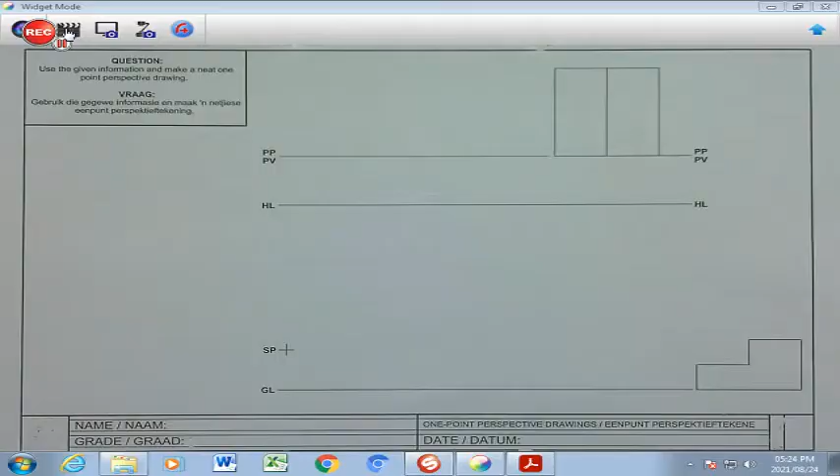Hello grade 9s, we have reached the final module, module 7, which refers to perspective drawings. It's not too difficult. Let's look at a few activities, and they are all the same.

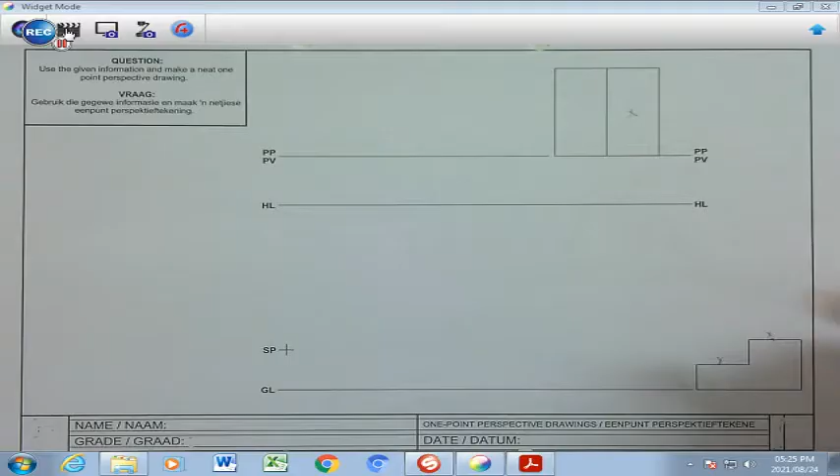Allow me to explain quickly. You have a block here shaped like a step, and this part here corresponds to that part over there. I'm going to mark that with an X - that's the higher part - and this part with a Y is the lower part you see there. That is the top view as seen from my arrow pointing down like that. This side here, represented by a line, is this entire shape that you see here.

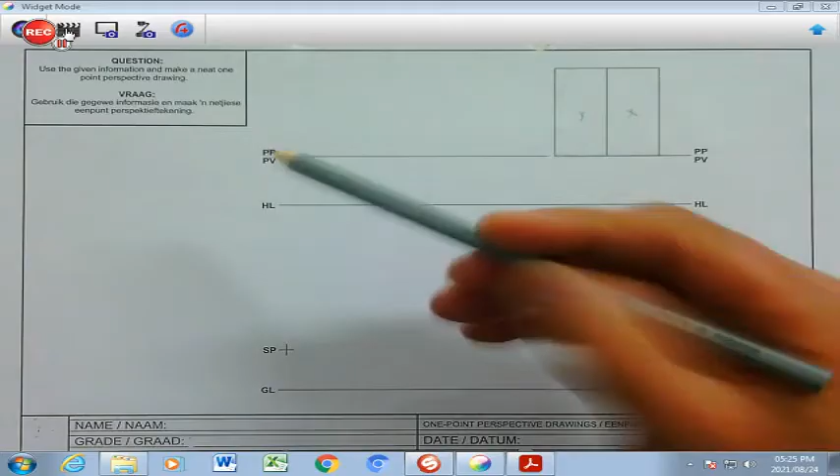Then we have three different lines here. The first line is your PP, your picture plane. This shape is situated on the PP line, which means these points here can be projected straight down. Points that aren't touching the picture plane must be drawn in line with your SP, which we have here, and I'm going to show you how to do that as well.

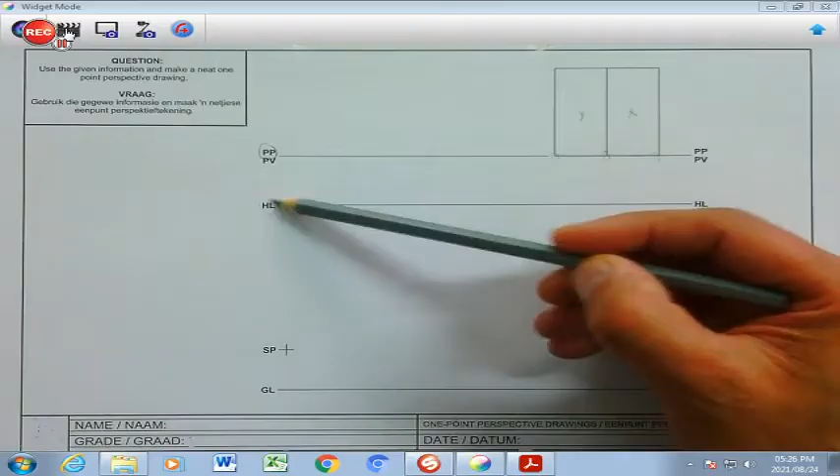The second line from the top is your horizon line. This line has the ability to move from drawing to drawing; at this moment it is here. Then we have our ground line - this is the line where the shape is situated.

And finally we have the station point. This is the point where you are standing, viewing this shape that you see here.

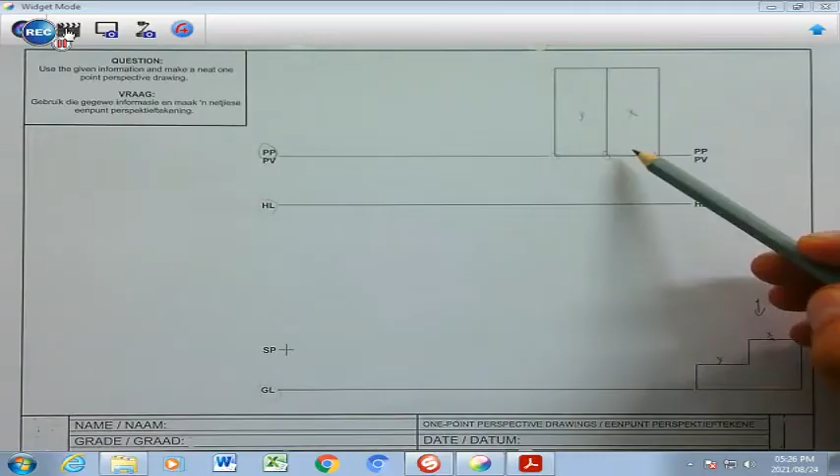Alright, we are now going to look at the construction of a one-point perspective and what rules to apply when doing this drawing. The first step is literally to draw this shape in this space here, and I want to show you how that works.

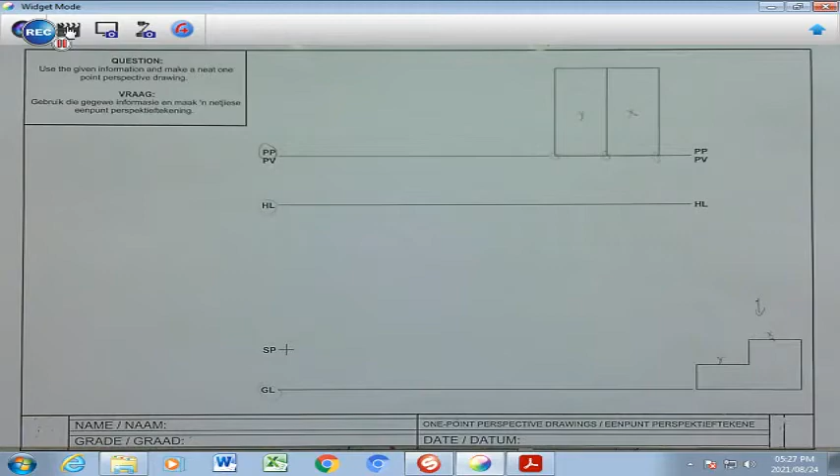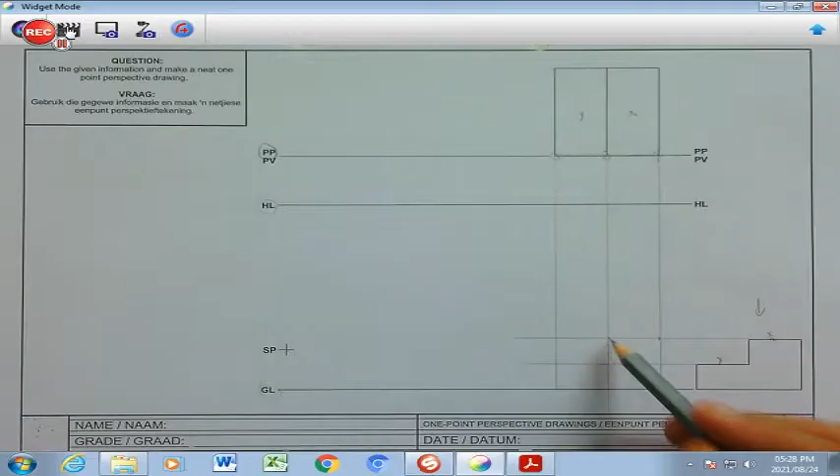So the 3 points touching, we're going to project down - 1, 2, and 3 lines down - and these will indicate my height. I'm going to project my horizontal lines across here; that's my height, and already you can see the shape. We'll highlight that shape starting with the top line, darken that, and that point over there, and the bottom one, all drawn horizontally.

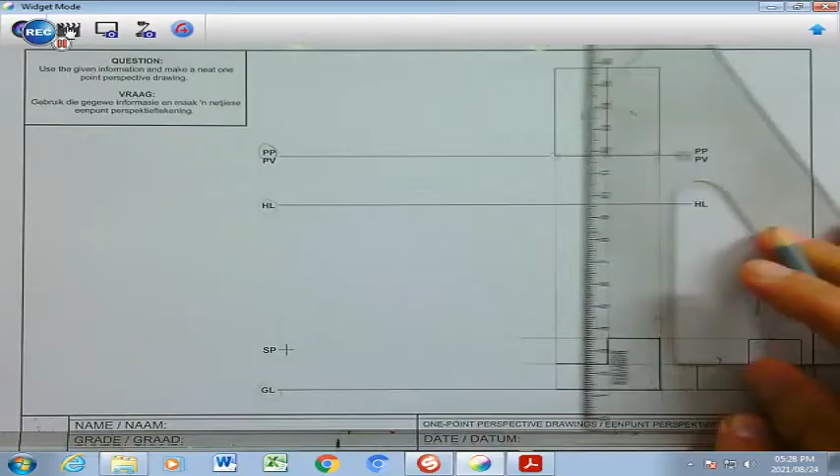Then I'm going to do my sides, which would be drawn vertically - that one, this one here, and that one over there. So I've created the shape in that space so that it's aligned.

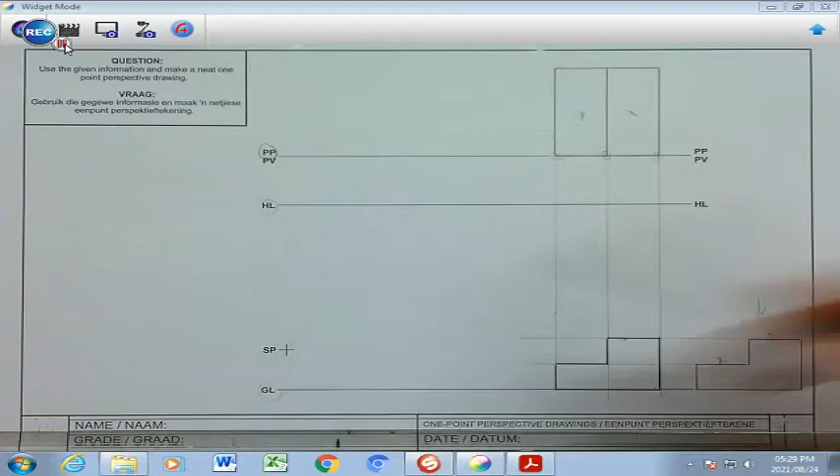My second step is that I have a stationary point here, which is where I'm standing viewing this, but I have to create a vanishing point directly above my stationary point. So wherever my stationary point is, I'm going to project the line up, and wherever it crosses my horizon line, I'll clearly mark it and write the abbreviation VP - my vanishing point. So my vanishing point will vanish with these corners which you see here.

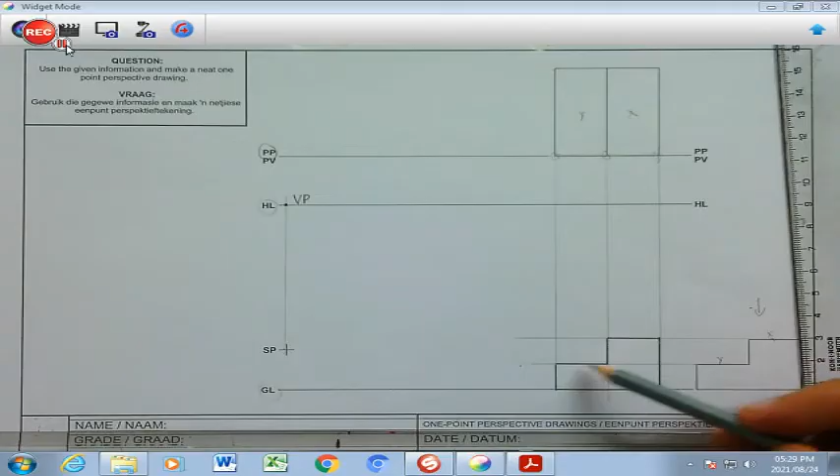So I'm going to look at my 3 other points not touching my picture plane - that one, this one, and this one over there. What I'm going to do is draw those 3 points in line with my SP. I'm going to keep my set square, or any straight edge, and draw that line until it gets to my picture plane.

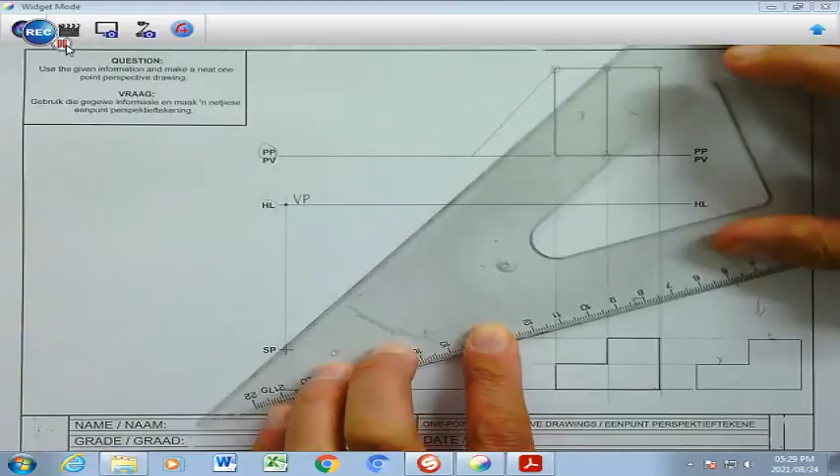I'm going to move to the second point there. I'll take this point and draw it in line with my SP, and take that point as well and draw it in line with my SP.

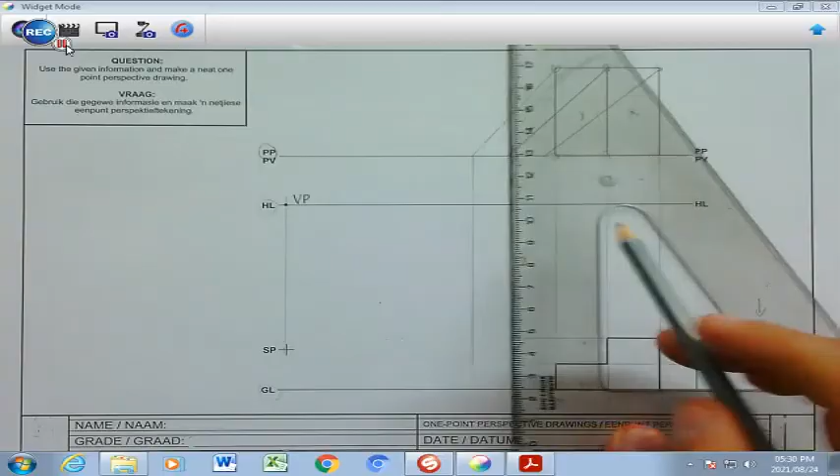I'm going to stop it there, because once it reaches the picture plane, it can come straight down, and it has the heights of these points which are actually touching here.

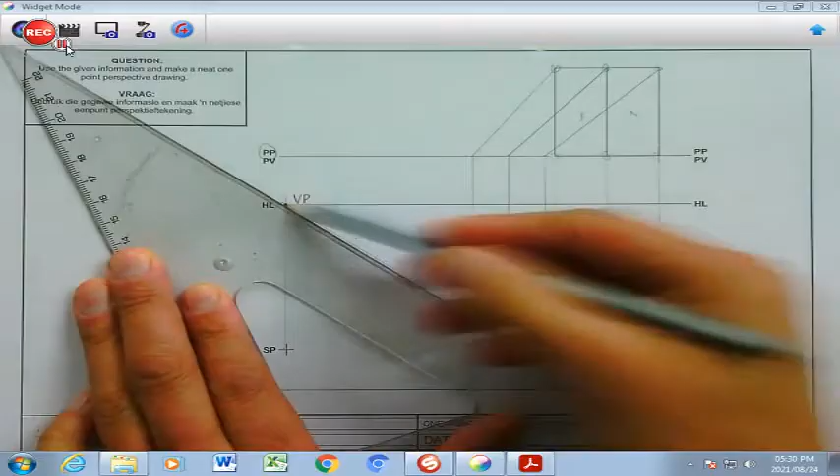My next step is to take all these corners or these points here to my vanishing point. So I'm going to start with that point over there by drawing that one, and moving to the next one, drawing that one there. That one going there, that one there, and the last one here.

Right, learners, now you have to ensure that you understand what you're doing. So I'm going to dot my points. So this becomes a side here. That point there, you can see.

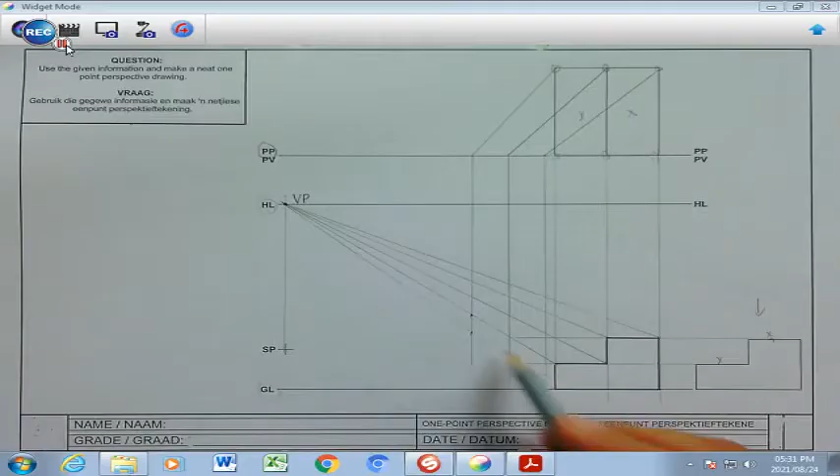There's my line, and I'm going to highlight my line, which is going to be that corner there. So I'm going to draw that corner there, and connect this corner to that corner on those lines which you've drawn faintly. And there I've created my first side, which is that side over there.

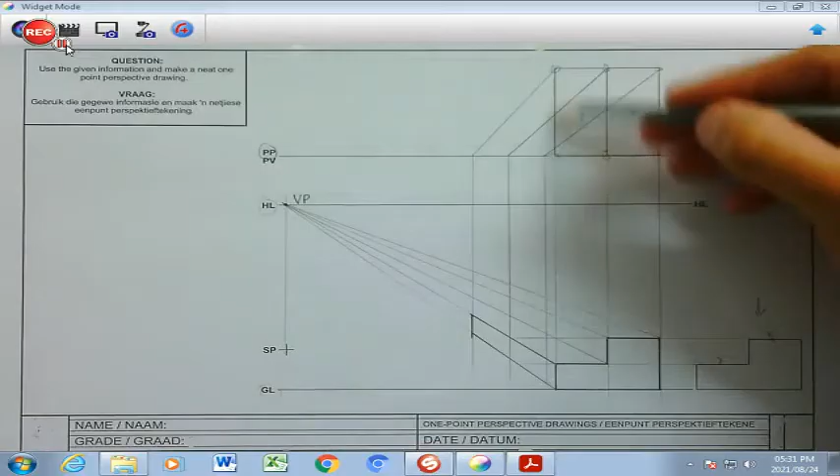Then of course you will see that goes up, and this goes to that side, which is basically horizontal, so it goes this way until that point over there. So I'm going to draw a line dark until that point over there. So you follow the side that you will see here.

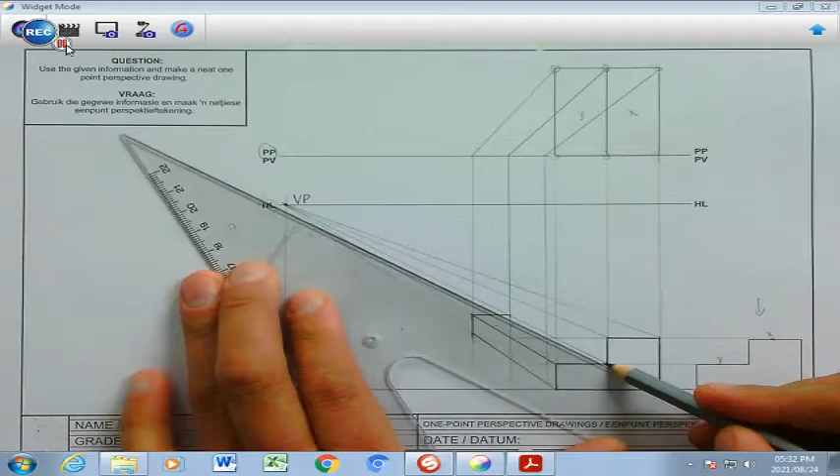Then I can create another platform here by connecting this line with this point to that line. Then it's going to go up, so it's going to go up, and there I will find that upright point connecting with that line.

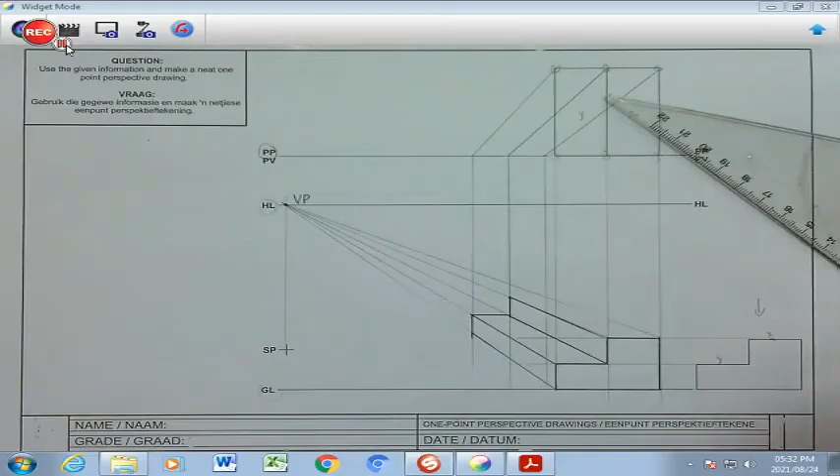There's another side that has formed, which I can now easily connect like that, and then immediately it goes horizontal again, which means I have to draw this line horizontal, and it meets up with that corner there and that corner there, which makes it very accurate and perfect.

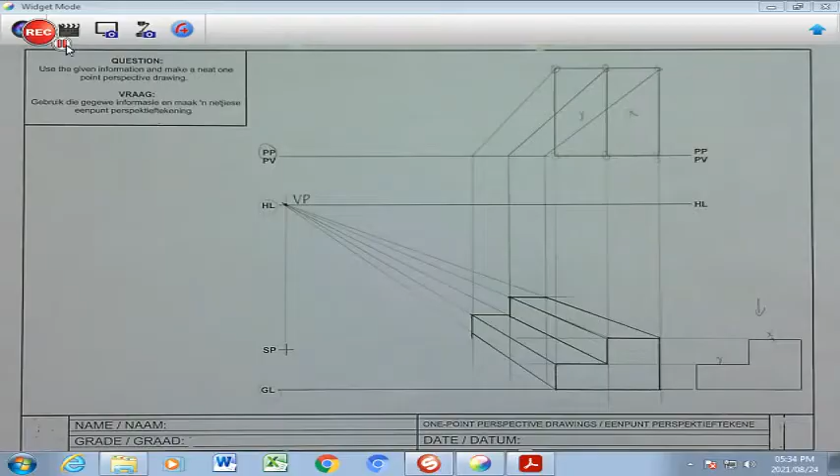So there's my line, and then I'm going to connect that point with that point there at the back. And there, young ladies and young men, I've created my block in a perspective view. You can see it starts here wide and it narrows the further it goes to my vanishing point.

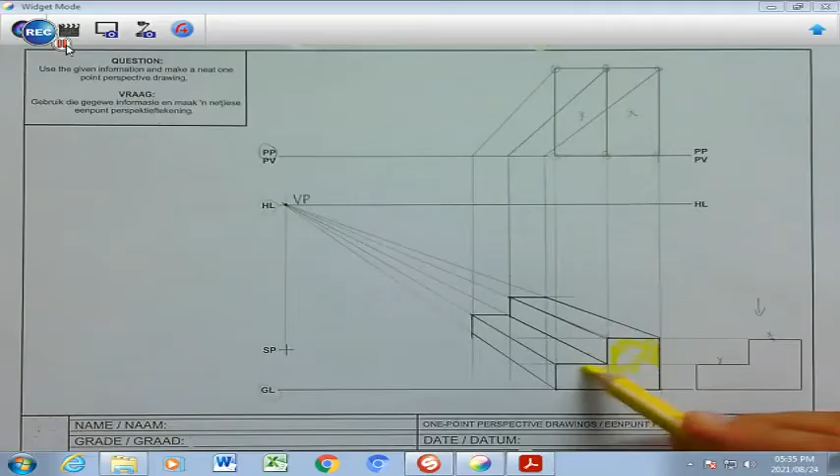That is the essence of this activity, to be able to see a correlation between the top and the side view. I'm going to highlight my drawing by adding some color, so you can do that as well, to make it nice and artistically pleasing on the eye.

I'm just going to do a rough coloring in. One side will be that color, and I'm going to use another color here. So you can use any color of your choice. So those are all the different sides.

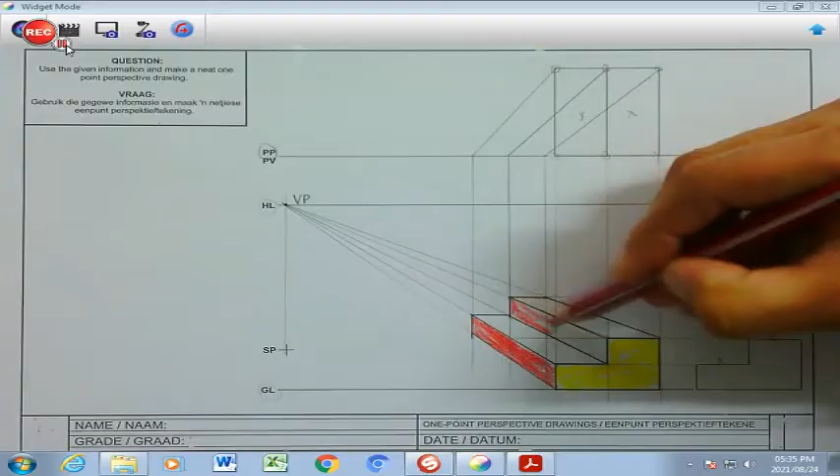So I'm going to color the sides facing to the front one specific color, and I'm going to use another color for the side that basically faces the top. And there I have completed my first one-point perspective drawing.

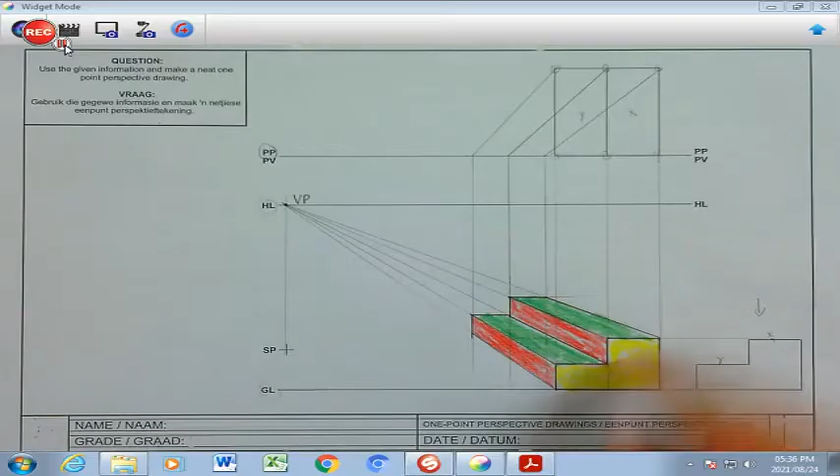So you will follow the same procedure in the first, second and third by redrawing this shape that you see here in that designated space with the lines touching the picture plane. Then you will have a vanishing point being created.

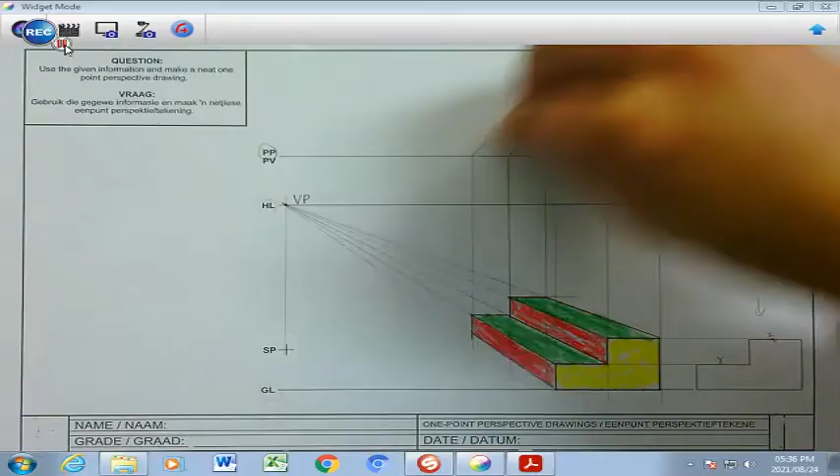These points go to the vanishing point. These points not touching will be in line with your SP until it reaches that picture plane there and brought straight down. And then you have to work it out according to the shape that you have here, what fits and where the lines actually go.

I hope you're going to enjoy this one.